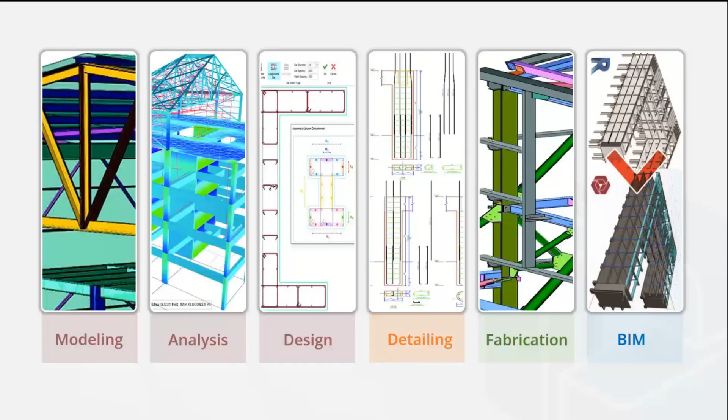ProtaStructure Suite consists of 4 different modules and can be provided as a single package. We have ProtaStructure, which is the core system for modeling, analysis, and design of your structures. It is complemented with other tools. ProtaDetails, a complete CAD system for automated detailing and drawings. It focuses on reinforced concrete detailing and includes a unique design library of calculations for designing things like retaining walls and piles.

ProtaSteel complements steel design by automating all the steelwork connection design, providing comprehensive steel detailing and automated connection design of your structures. Important to note, we provide assembly and part drawings and calculation reports for connections within ProtaSteel. Also, you can communicate to other software through ProtaSteel.

And finally, ProtaBIM allows you to connect with other tools and systems that you may be using, allowing you to collaborate better with your teammates. It has bidirectional integration with Autodesk Revit. ProtaBIM also allows you to communicate with other BIM platforms and software solutions through IFC and SAF files, or you can even share your analytical model data with SAP 2000 and ETABS.

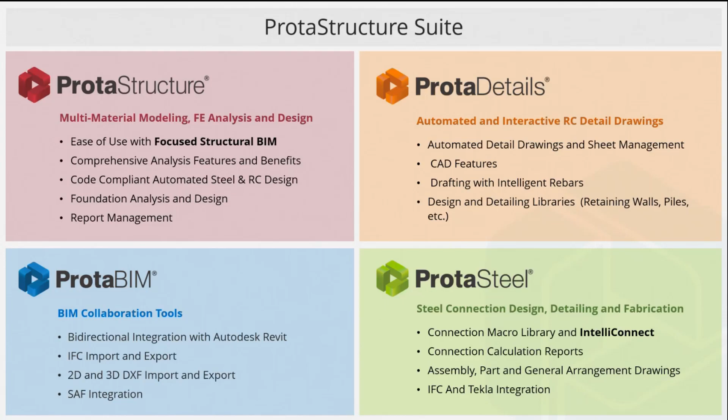So we have been expanding our reach around the world, covering 25 international design codes, 9 languages, such as Polish, Spanish, Portuguese, English, and Thai. We have also been busy creating design guides and insights into how the software works. For example, many of our users benefit from technical guides that cover guidance to, for example, punching shear checks, foundation design, seismic design, retrofitting, and many other topics.

Here, I want to briefly summarize some of the milestones of Prota Software's journey throughout the years. Some of you might actually know us from back in 1992 as Prota launched ProBina Orion, which is the world's first concrete building design and detailing system. In 2005, ProBina Orion had provided the first ever building solution for retrofitting and rehabilitation. In 2007, Prota invested in BIM technology and launched ProtaBIM, which, as I mentioned before, provides bidirectional physical model integration.

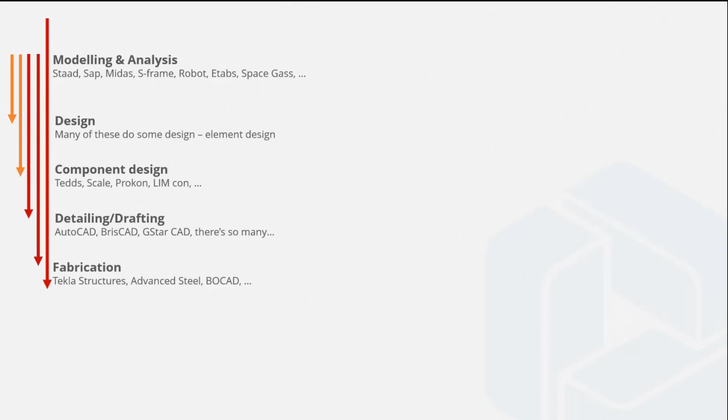As you know, there are several BIM software solutions that offer various services such as modeling and analysis, design, component design, detailing and drafting, fabrication, and structural BIM. Our core advantage is that ProtaStructure Suite offers these important features in a single suite. So we can confidently say ProtaStructure is a software for streamlined modeling and analysis, a software for designing your steel connections, concrete beams, core walls, foundations, and more.

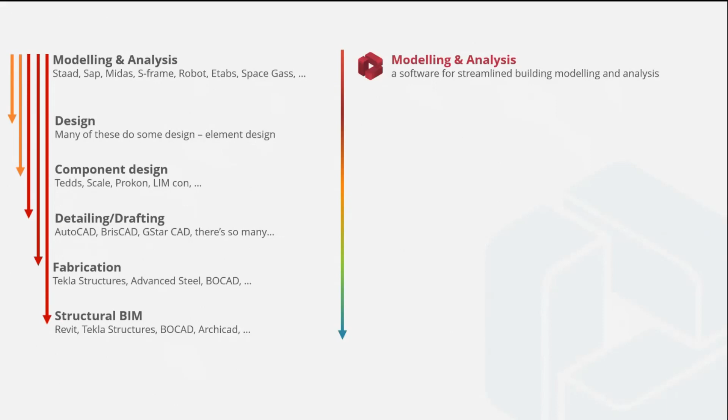A CAD software for dedicated structural drafting and producing all your engineering drawings, with component design for other project elements such as retaining walls. It is a fabrication software for producing all of your construction and shop detail drawings, and a BIM software for communicating all of this to other project team members.

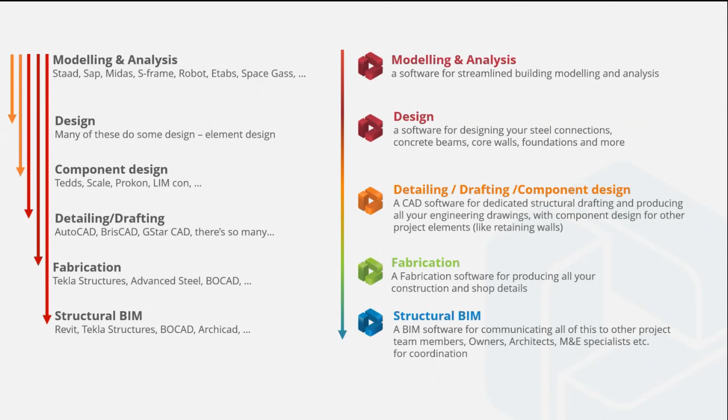As mentioned earlier, ProtaStructure forms the core of our suites. It's the BIM design solution for concrete and steel buildings. Some of the capabilities offered are flexible 2D and 3D modeling, multi-material modeling with physical objects, analysis and detailed design to international seismic and design codes, full design reporting and quantity takeoff, and so on. With ProtaStructure, your business will benefit from rapid modeling on an easy-to-use platform while effortlessly creating your intelligent drawings and full design documentation with the availability of a wide range of international design and seismic codes.

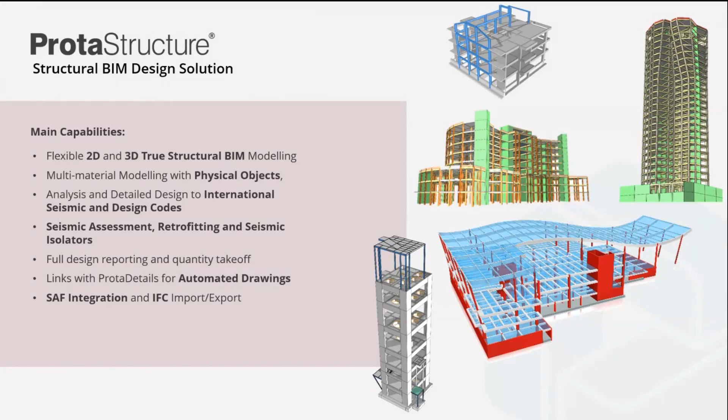Working with ProtaStructure, ProtaDetails is a revolutionary system for automatically creating and organizing all of your structural concrete detail drawings. ProtaDetails can automatically calculate quantity takeoff, full or partial. It is linked to the ProtaStructure model. Therefore, you can reflect the changes in the ProtaStructure model to the drawing in ProtaDetails automatically. There are many macros built into ProtaDetails, which will help you save time on component design. We continuously expand our library of component macros in ProtaDetails.

You can save hours of drafting time by seamlessly extracting the design details from ProtaStructure and automatically arranging them onto your company drawing sheets. Besides these unique features, ProtaDetails is a powerful CAD software, so you can use it as your daily CAD software.

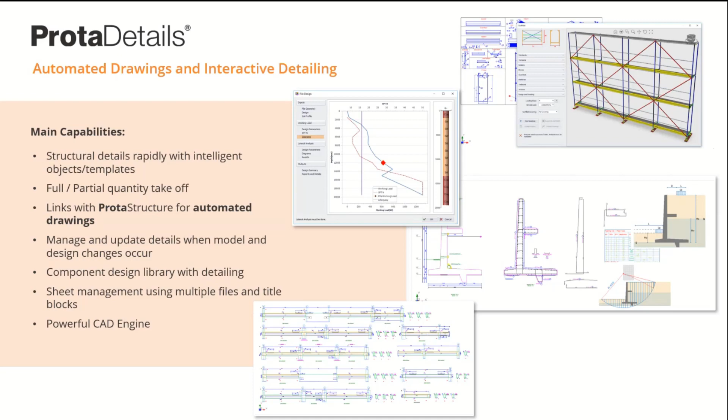ProtaSteel is our all-in-one steel detailing solution that allows structural engineers and detailers to perform automated steel connection design and produce high-quality steel assembly and part drawings in a few minutes. You can take models designed in ProtaStructure directly into ProtaSteel and save hours with the automated design of a comprehensive range of bolted and welded steel connections of your choice.

Similar to ProtaDetails, ProtaSteel is also connected to ProtaStructure. Therefore, the changes in the ProtaStructure model can be reflected to ProtaSteel, even though the modeling is done in ProtaStructure. You can add ancillary steel members in ProtaSteel, such as handrails, purlins, and girts. Furthermore, ProtaSteel allows you to export the model to other BIM software.

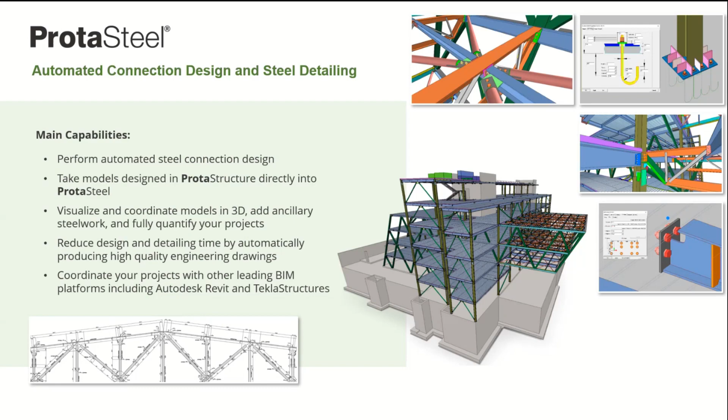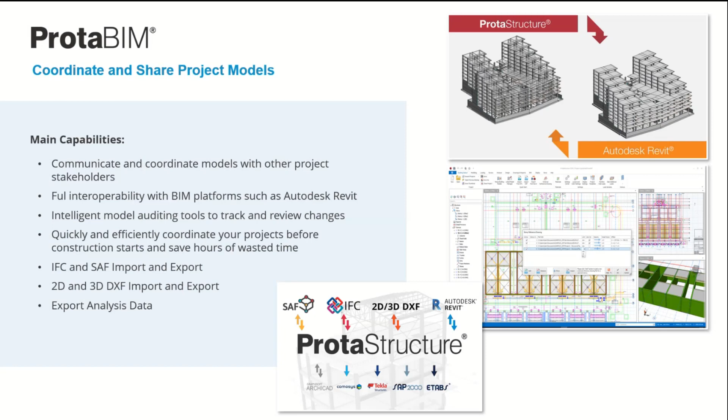So ProtaStructure is developed with BIM in mind. Here on this slide, you can see the entire BIM flow of our software solutions. Remember that these solutions are offered in a single economical suite called ProtaStructure Enterprise. So just to recap on our capabilities, you can bidirectionally link your models to other BIM platforms and software solutions like Revit with the latest data formats, including IFC, DXF, and SAF.

You can use ProtaDetails, our structural drawing and detailing software, for automatically creating and organizing all of your reinforced concrete drawings with only a single click. And you can take models designed in ProtaStructure directly into ProtaSteel and save hours with automated design of a comprehensive range of bolted and welded steel connections. You can even transfer and compare your analytical model with other general-purpose analysis software such as ETABS and SAP 2000. You can also create and share highly visual calculation reports with Microsoft Office and PDF export abilities.

So product excellence is a necessity in our sector, and it is also the key to our success. ProtaStructure is being used by thousands of large enterprises all around the world. Some of them are seen here. These organizations have been using our products to deliver their engineering projects.

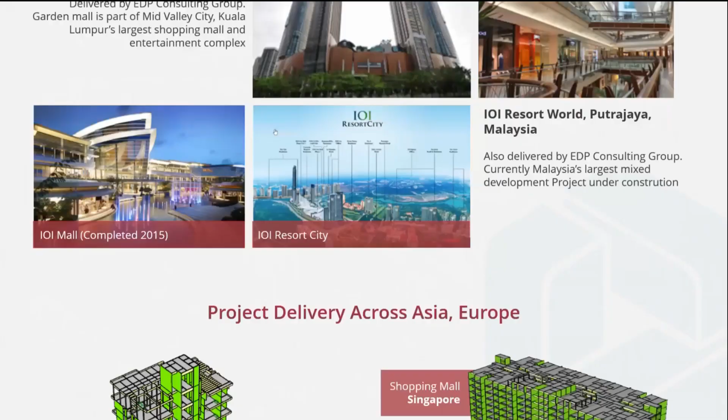A few other examples from Kuala Lumpur and Putrajaya in Malaysia. You can see Garden Mall and Resort City projects that were delivered in Malaysia with ProtaStructure Suite. And a shopping mall in Singapore and an office building are among other projects delivered with ProtaStructure Suite.

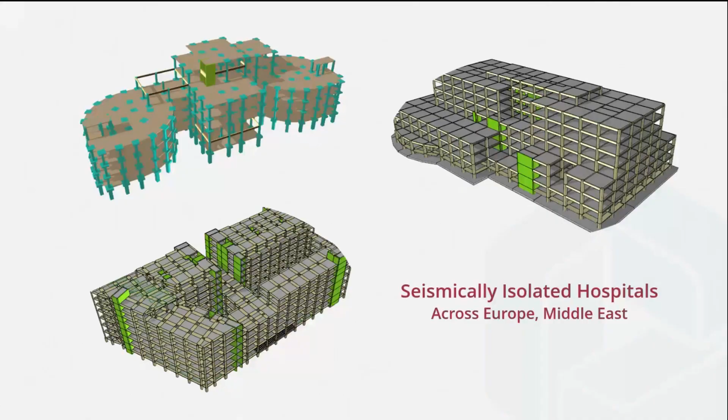Several hospitals were also designed with ProtaStructure. One worthy note is that these hospitals are also seismically isolated buildings. With ProtaStructure's unique seismic capabilities, you can insert seismic isolators into your buildings. Again, several international airports and train terminals across Russia, Kosovo, Egypt, and Turkey were delivered with ProtaStructure Suite.

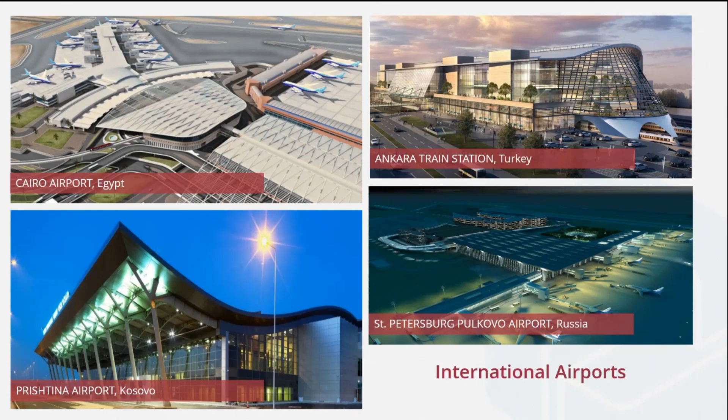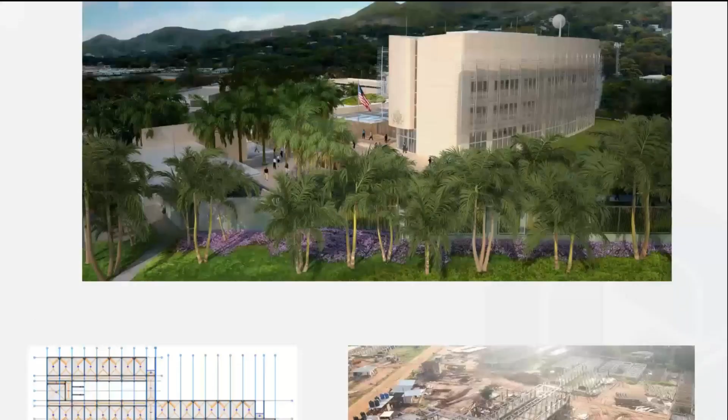And this is the USA Embassy building located in Papua New Guinea, which was also designed with ProtaStructure Suite. And this project is designed by Mr. Ofiku himself using ProtaStructure. The University Dome project is currently under construction in Nigeria. This is another project from Nigeria. The residential complex is supported by pile foundation. Another fascinating work from our users in Nigeria.

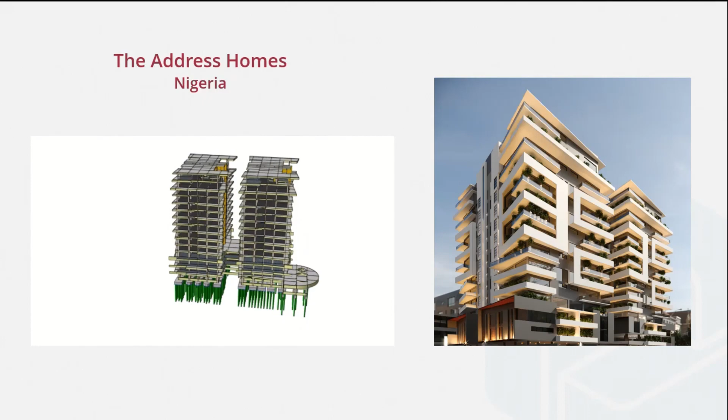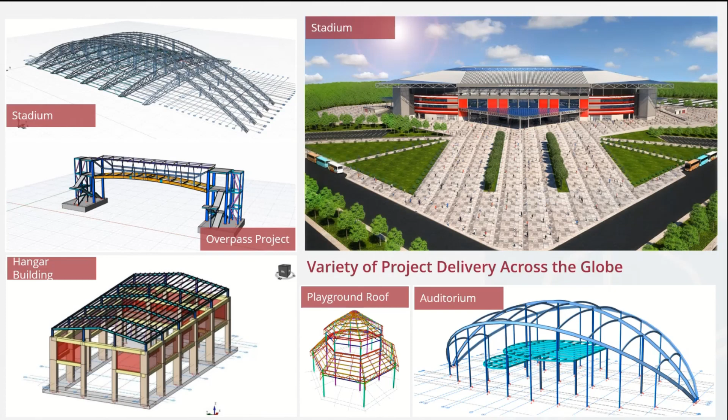As a summary, you can see that our strength lies in buildings and building-like structures. You can pretty much design any type of building with ProtaStructure Suite. Here you can see a variety of other buildings such as stadiums, auditoriums, playground roofs, and hangar buildings, modeled and designed by our users around the world.

So, what do we offer to our clients that have become customers? Our licensed users of ProtaStructure Suite do not just benefit from their licensed software technology alone. We give every new license owner 1 year of maintenance to ensure a smooth onboarding period for newcomers. Hence, within this framework, our customers are given access to our comprehensive and dynamic Prota Center, where they will be able to browse through our collection of knowledge base articles, create support tickets to get help from Prota support team,

view previous tickets and follow up their status, and ask questions in community forums and easily share information with other engineers. On top of that, customers are able to receive updates and new releases during their maintenance plan. For more details, you can reach out to our global sales team separately.

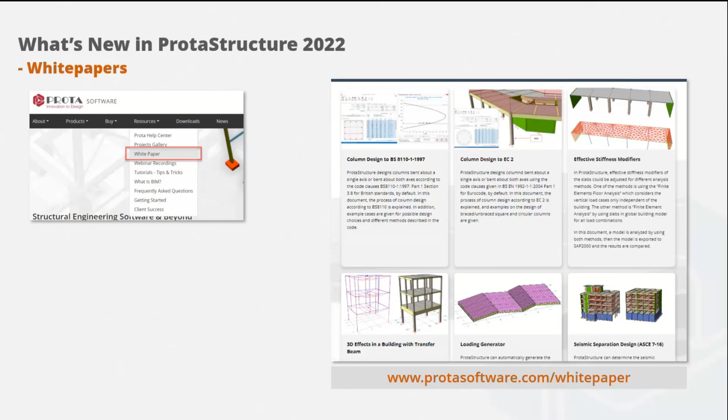As I have mentioned earlier, we have been writing a lot of white papers, which are technical documents highlighting mainly newly added features. So feel free to visit protasoftware.com/whitepaper to have a read. I am sure you will be interested to learn about the technical details surrounding these features. Of course, more material is made available to paid users through Prota Help Center, but the free content gives you an idea. We emphasize transparency and put much effort into being transparent with our users and believe in a healthy two-way communication from our community to ensure ProtaStructure Suite continues to benefit engineers around the world on a daily basis.

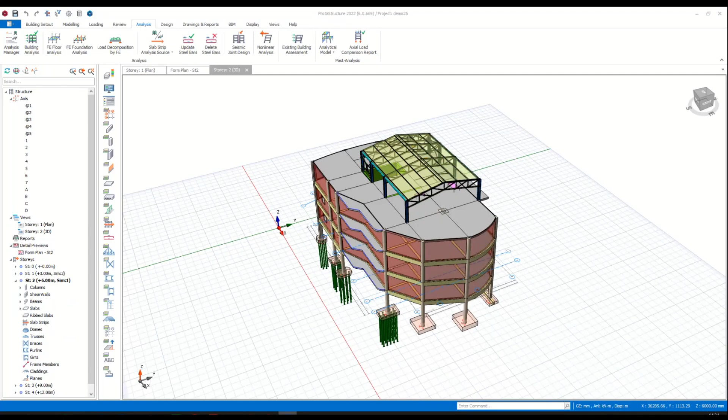And thank you for bearing with me for this long. I know you are excited to see the software. So, okay, this is ProtaStructure. In this part, I will give you a brief overview of ProtaStructure. Together, we will navigate through the software. So let's start with the structure tree.

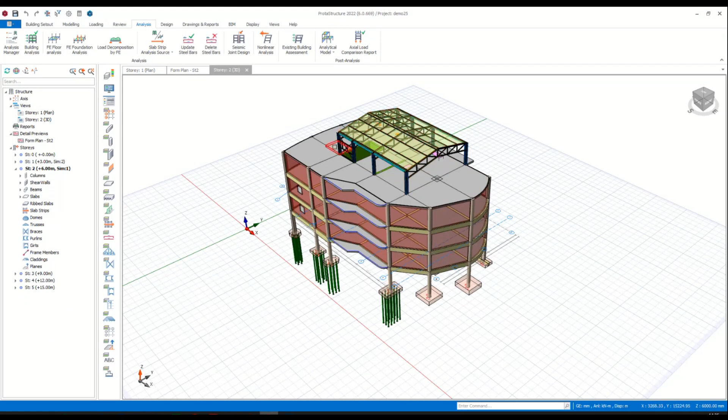Similar to every other BIM software, ProtaStructure has its structure tree on the left-hand side, which contains the information of your model. Under the structure tab, you have your axes listed like this. If you select any axis from this list, as you can see, they will be highlighted on the 3D view. In addition to the axes, you have your views here, which you can switch through. You can also switch between views at the top of the view screen.

And maybe the most important feature in the structure tree is the stories part. In this part, the components of the model are organized by story. So you can see each and every member of your model based on their story. You can see all of the columns in story 2, for example, all of the beams, slabs, and so on. You can use this interface to select them, and for complicated projects, you can use this list to find a specific member in your model easily.

On the top, you are seeing our revolutionary ribbon menu. This ribbon menu is designed considering the workflow of designing a project. You start your project by setting out your building. Then you model your structural members. Then you continue with loading. Before the analysis, you review your model, your loading, your sections. And you continue with the analysis. After the analysis, you design your members and get your detailed drawings and calculation reports.

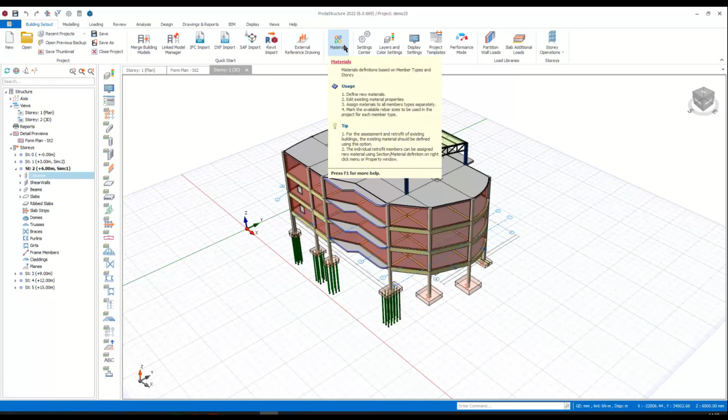And right next to it, you will see the materials tab. Materials are, as you know, very important for structural design. So we have created a well-organized material selection window here. So in ProtaStructure, you can have different floors with different materials. So you can add different stories having different materials from here.

And then for each story, if you like, you can change the materials for columns, walls, beams separately. The similar applies to the steel members. You can have different steel grades for different types of members.

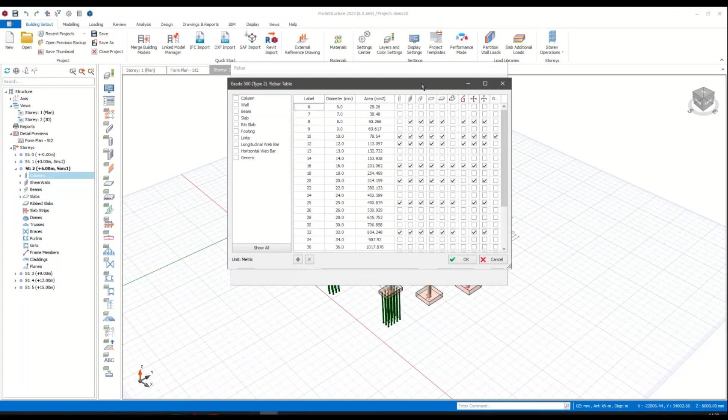Also, for the rebars, you can specify the available rebar diameters in your region from here for different types of members, again, for columns, walls, beams, and so on. And the program will obey your preferences that you have made here and use the available rebars only in structural design.

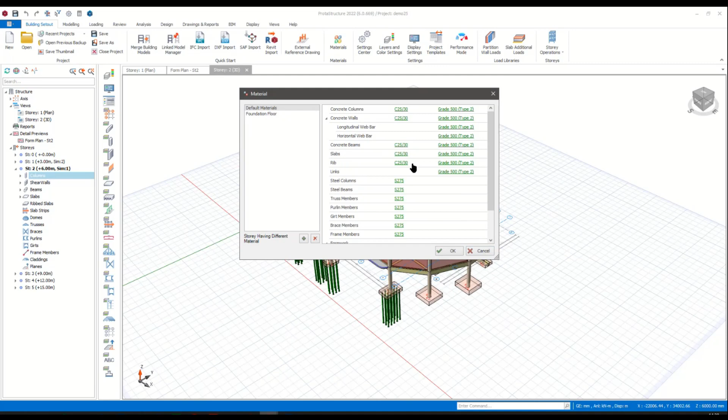And also, in addition, every input here is editable, so you can change the material properties, or you can add new materials if you want. So let me continue with the settings center. Most of the parameters and settings related to the use of the program, the interface, and the design preferences are organized in this options pane.

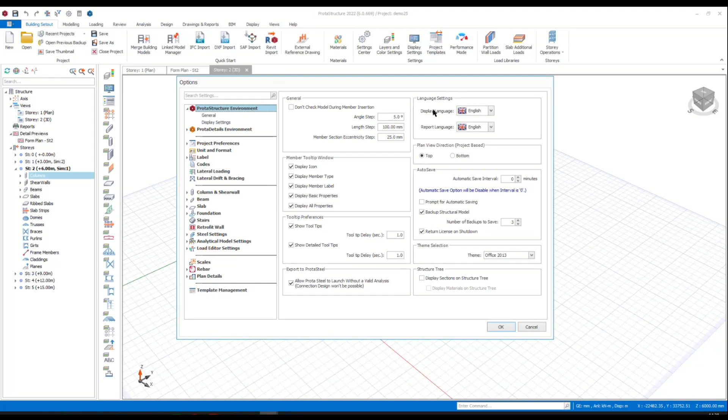Here, for example, you can change the language of the software. You can change the theme, and you can change your units and formats. So you can change the units anytime you want. For example, you can change the units after you model the structure, after the analysis. You can change the units anytime during the design process. We have three main unit systems, which are SI, MKS, and Imperial.

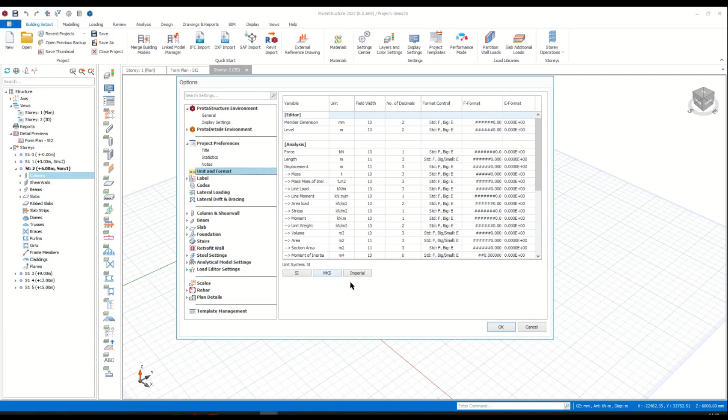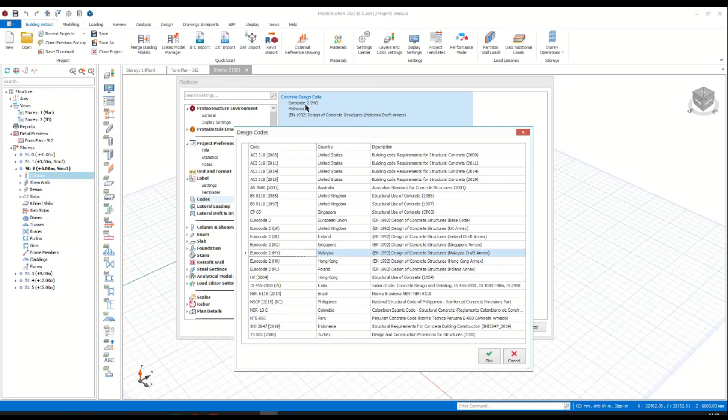So again, here you can change the label settings, the display of labels in plan view. You can change them from here. And most importantly, you can change your design codes. So ProtaStructure supports many design codes all around the world. So you can just change them by clicking on them, and you can select the code you want from the list.

And in addition, you can change some design related stuff for elements. For example, you can change your rebar preferences for columns. You can change the rebar patterns for your beams. You can make many adjustments regarding the design of the members.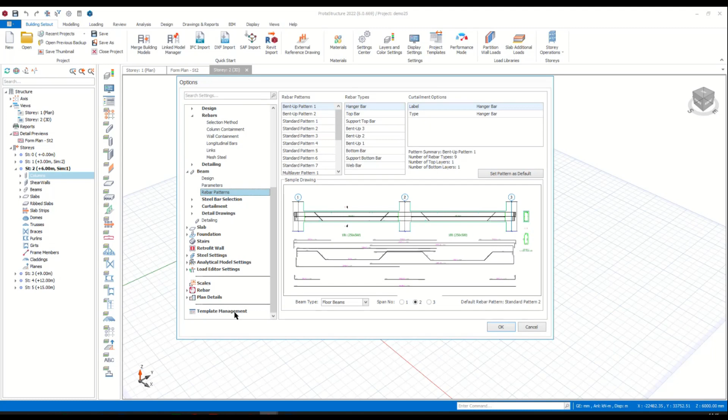Also, another important thing here is the template management part. So ProtaStructure uses templates which contain the settings in them. So we provide you some localized templates at the beginning. Once you want to create a new project, you have to select a template.

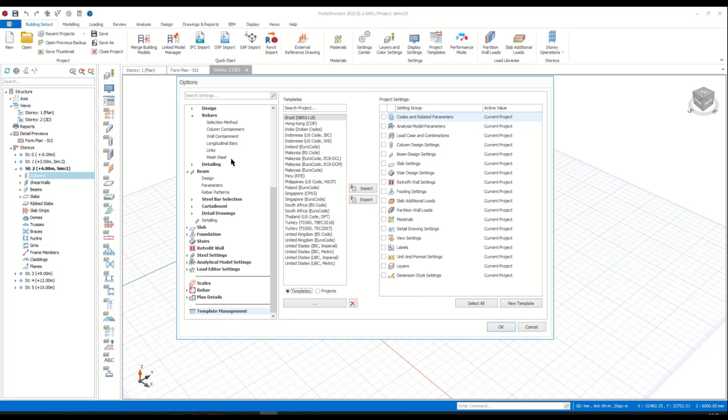And in addition to these predefined templates, you can use your past projects as your template. So you do not have to mess with the settings every time. You can use your past settings from another project. So again, next to the settings center, we have some shortcuts for certain settings. And also, if you are running a low spec PC, you can use performance mode to have a more fluent experience with ProtaStructure.

And here we have load libraries for partition wall loads and slab additional loads. So from here, you can basically build your wall and make the software calculate its load value. So we have some predefined ones here. You can add new ones if you like.

And also you can add new layers to the walls, for example, plaster or tiles. You just enter the thickness here, and the software will automatically calculate the total load value. Also, you can add new materials to become layers from this edit materials interface.

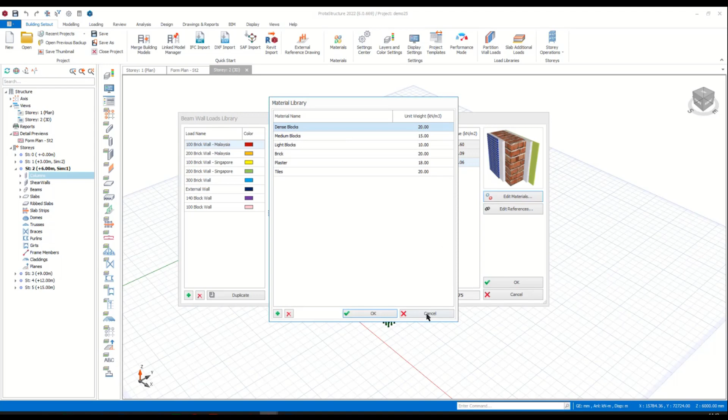And also another important aspect here is the story operations part. So from here, you can insert new stories to your building. You can remove existing ones. You can delete the members in a particular story, or you can generate stories from one to another.

Also, the edit story menu is a very important menu in which you can see the overall information regarding your stories. You can set your effective top story and number of rigid basements, which are very important inputs for seismic design, especially. And again, from here, you can adjust your story bottom level so that you can arrange the other story elevations. And also you can specify your foundation depth from here.

And another aspect here is the similar stories concept. So in ProtaStructure, you can make two stories similar. In this way, if you change anything in one of the stories, the changes will be reflected to the similar stories.

So you can use this feature, for example, for making small adjustments in your building. So you have, let's say, 10 stories. They are all similar, so you can make the changes in only one story, and the changes will be reflected to the other 9.

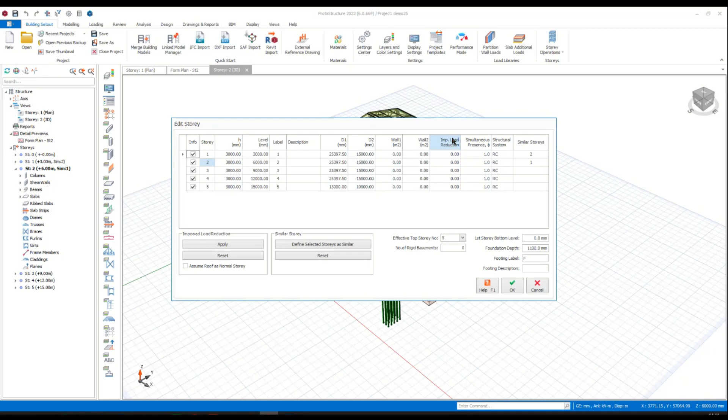And next to the building setup, we have the modeling tab. Here you have mainly 2 different ways of modeling axes. So you can model them one by one using grid, and also you can insert multiple orthogonal axes using the orthogonal axis generator.

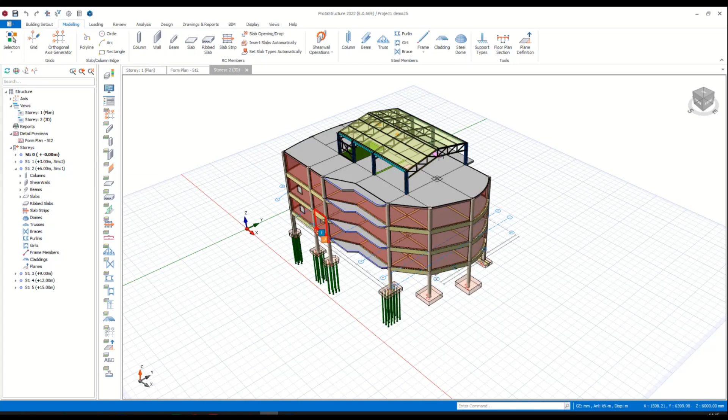Next to those, we have some drawing tools for slab or column edges. For example, this balcony slab here is modeled using the polyline option here. So I have drawn a polyline around the edges, and then I have inserted a slab inside it. Similarly, you can draw some enclosed polylines and convert them to columns.

And in the reinforced concrete modeling, we have organized all of your reinforced concrete members here in this section. You can have your columns, walls, beams, slabs, and other concrete members. Also, you can merge concrete wall panels and unmerge them from here.

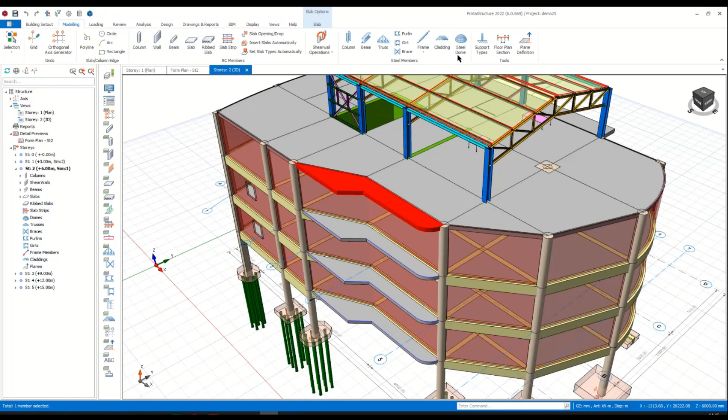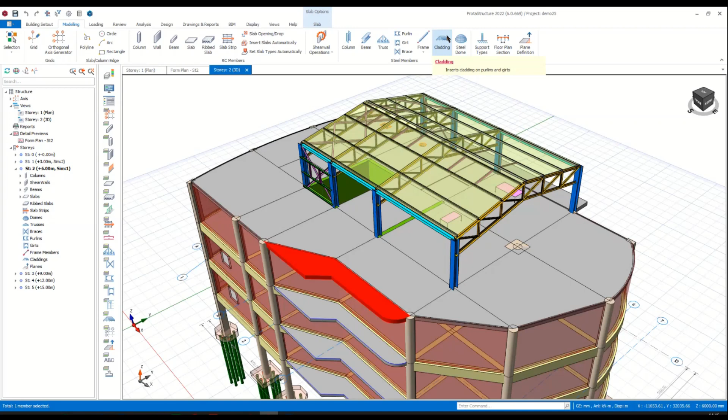And then, similar to the concrete members, we have grouped steel members here. In ProtaStructure, you can model steel columns, beams, trusses, purlins, girts, and braces. And we also have a multi-purpose frame member, which you can use for free modeling. And on top of that, you can add claddings on purlins and girts to decompose your loads.

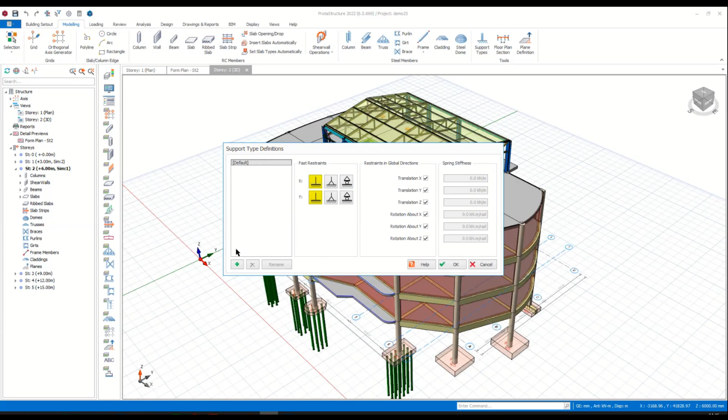So support types are another important aspect of structural modeling. By default, we offer you a fixed support for both directions, but you can change it and you can add new support types from here. You can have your supports pinned or roller, and you can arrange each and every degree of freedom from here. If you like, you can add some springs for those degrees of freedom too.

And lastly, in this tab, I want to mention the plane definition. The plane definition is mainly used to model slanted members. You can define an imaginary plane on the plan, and then you can make your members, your slabs or your beams, for example, adjust to that plane so that you can have slanted slabs or beams.

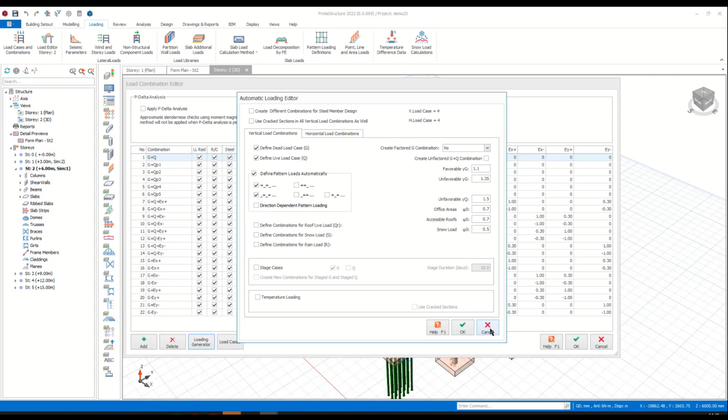So now we have covered the modeling part. Now let's move on to the loading. The first thing here is the load cases and combinations. ProtaStructure can automatically produce your load cases and combinations according to the selected design codes and your preferences that you have selected here. We have separated the vertical loads and horizontal loads into these tabs so that you can set your preferred settings, and if you press the OK button, the combinations will be automatically created.

And if those load cases are not enough for you, you can add your user-defined load case. And after adding those load cases, you can edit those coefficients for each load case here, to include your user-defined load case into the load combinations. And of course, you can add new load combinations by using this add button, and you can delete them with the delete button.

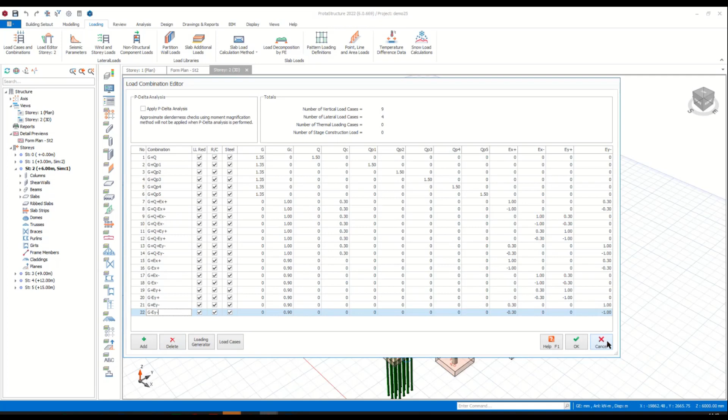So next up is the load editor. ProtaStructure has a comprehensive load editor in which you can see every applied load on a certain story, and also you can open this load editor on an element basis, which I will show you in a minute. So from here, you can see all of the loads applied to the structure. You can apply new loads to the selected load case here.

Also, another important note here: let's click on this one and we can see the properties of this load, and it says this load is decomposed from 2S1 slab. What this means is ProtaStructure automatically decomposes the slab loads into your beams during the modeling phase with the default method, which is the yield line method. We also have finite element method decomposition, but you have to conduct a finite element decomposition analysis to do that. But for the yield line method, they are automatically decomposed during the modeling phase.

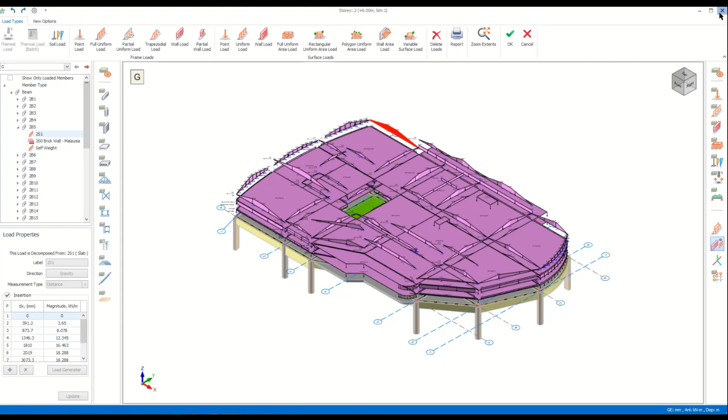So also let me show you the load editor on an element basis. Here you can only see the 2C10 column, so that you can apply your loads, point loads, uniform loads, trapezoidal loads on the column separately from the other members. Also, you can copy and paste the applied loads between similar elements.

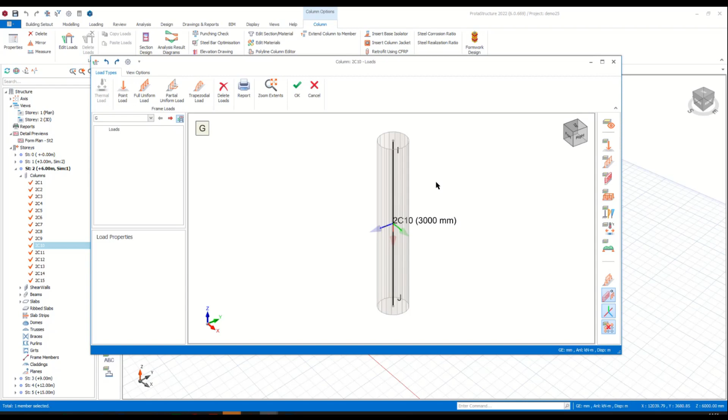And let's move on to the seismic parameters. So we have a very comprehensive seismic parameters interface in which you can see the design spectrum and elastic spectrum in the middle. Also on the right-hand side, you can see the spectrum points. Of course, these spectrums are calculated as per the selected earthquake code and using the user-defined seismic and structural parameters given on the left-hand side.

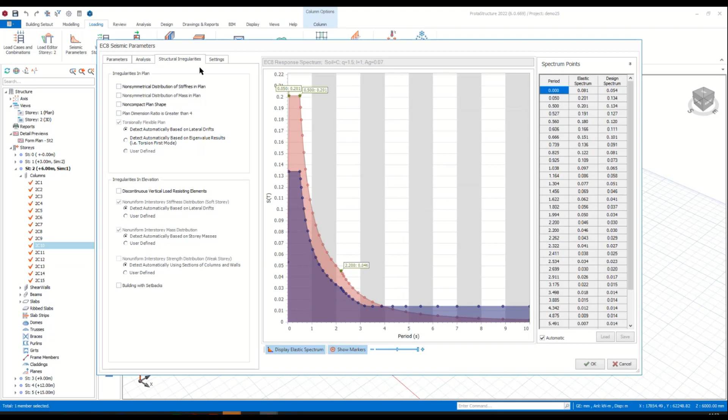Also, ProtaStructure can automatically detect some of the seismic irregularities on your structure, and for the other ones, you can specify them from here, and then their penalties will be applied to your model by ProtaStructure.

From this button, you can calculate and assign your wind loads at story levels. With this one, you can calculate the non-structural component loads. And next to them, we have a shortcut for the load libraries again. We have discussed that. And here you can see the slab load calculation method, which I have discussed earlier. The default one is the yield line method, and you can change it to the finite element method from here. And if you change it, you have to do load decomposition by finite element analysis.

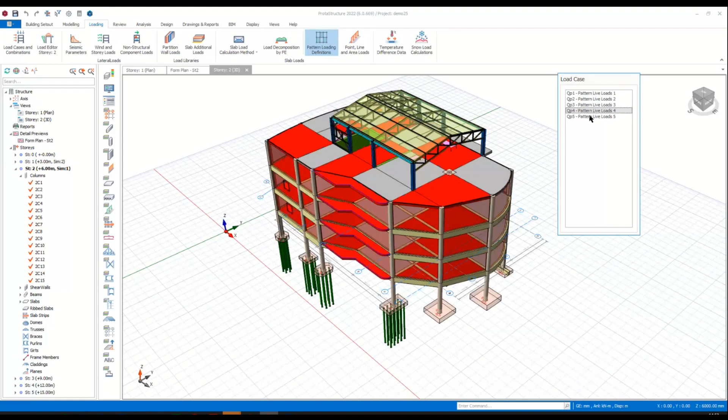Also, the live loads are applied to your structure with checkerboard patterns. Here you can see the different cases in which the loads are applied. And using this point, line and area loads button, you can add point, line or area loads on your slabs. And from here you can enter the temperature difference data, and from the snow load calculations you can calculate snow loads for certain cases.

So after loading and before the analysis, we may want to review our model. So ProtaStructure offers you an automatic building model check from here. What this does is it investigates your model and detects inconsistencies, such as overlapping members, overlapping axes, unused axes, and so on. So before the analysis, I strongly recommend you to conduct the building model check and fix your model if you get any errors.

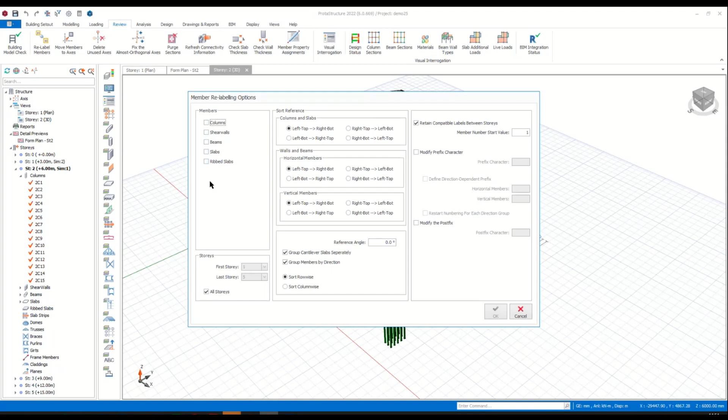Also, you can relabel your members from left top to right bottom or right top to left bottom, and so on. You can select which members you want to relabel, and then if you start the relabeling, it will change the labels of your columns, beams, and walls according to the rules that you have selected from the interface.

And also, we can move members to axes, delete unused axes, and fix almost orthogonal axes automatically from these functions. And the software can automatically check your slab thicknesses and wall thicknesses, and it can list the member property assignments for each member.

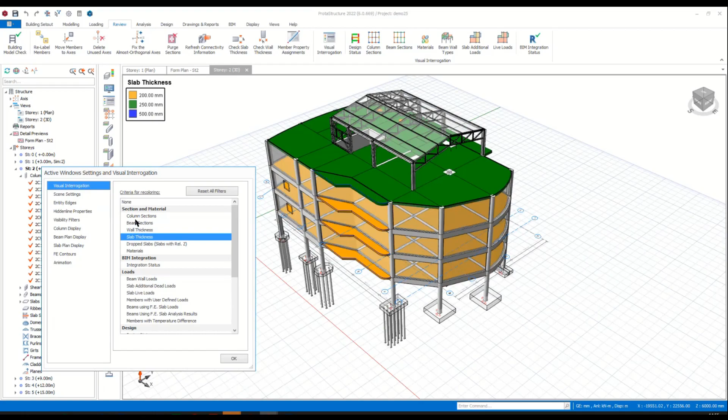And here we have the visual interrogation. It's another important aspect of ProtaStructure. This is a very important tool that you can use during modeling, after analysis, and after design; you can use this tool in each part of the workflow. So, for example, you can see different column sections, different beam sections, different slab thicknesses, and so on to control your sections. And also you can see the used materials as well.

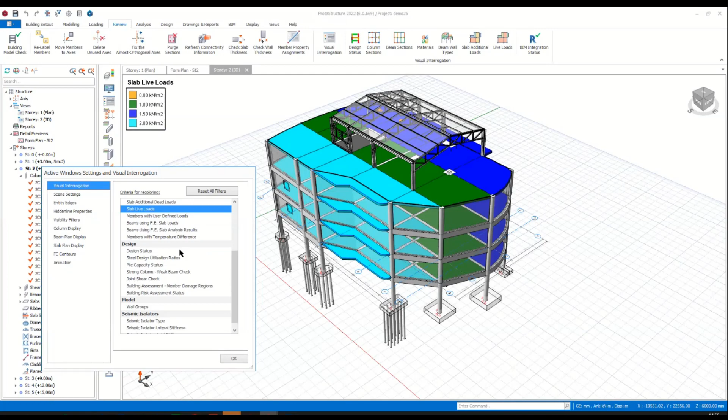And for example, after you load your structure and you want to check if you have loaded your structure correctly, you can use this part to check slab additional dead loads and slab live loads. And after the design, you can see the design status of each element. You can see the steel utilization ratios. You can see pile capacities, strong column weak beam checks, and so on. So again, it's a very helpful tool for you. It can be used in each stage of your workflow.

And next to that visual interrogation button, you can see some shortcuts for certain visual interrogation features, such as design status, beam wall types, slab additional loads, etc. So we have reviewed our structure. Now we can move on to the analysis.

And at the left-hand side, you can see the analysis manager, in which all of the conducted analyses are listed. So if you have done building analysis, it will be there. If you have done finite element floor analysis, they will appear in the analysis manager. And you can delete the existing analysis from there if you want. So let me move on to the building analysis menu.

And in this menu, in the pre-analysis tab, you can find some general information and important shortcuts for Settings Center, for system parameters, for loading combinations, and wind and story loads. And also the materials are previewed here, the used materials. And again, we have a shortcut for the edit materials part.

In the model options, you can set the options for your analytical model. So for example, you can specify the material and section effective stiffness factors, which will be used for the cracked concrete load cases. Also, you can find the soil structure interaction options here.

And you can set how you like to model your shear walls in the analytical model. You can use mid-pier model, or you can use finite element shell model, which is the state of the art right now. So similarly for the slabs, you can set them to be included in the building model. You can set their shell mesh sizes here. You can set stories to be meshed. For example, only the fourth story will be meshed for this model during the analysis.

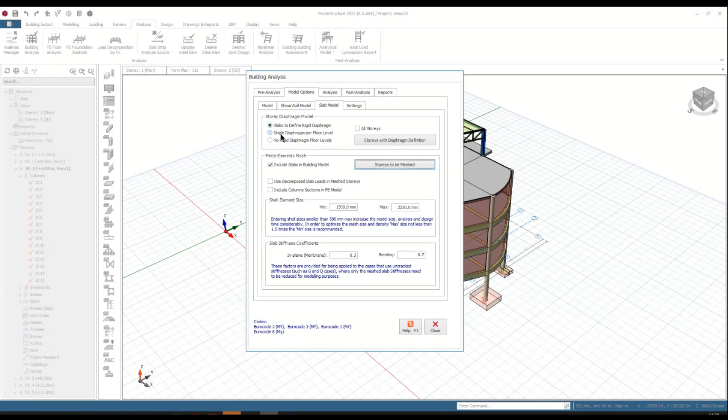And also you have the rigid diaphragm options on the top. You can set slabs to define rigid diaphragms. You can set single diaphragm per floor level, or you can set no rigid diaphragm for floor levels. And also you can specify the stories with diaphragm definitions. So in this model, we will have slabs to rigid diaphragm for story 1, 2, and 3, and there will be no rigid diaphragms for stories 4 and 5.

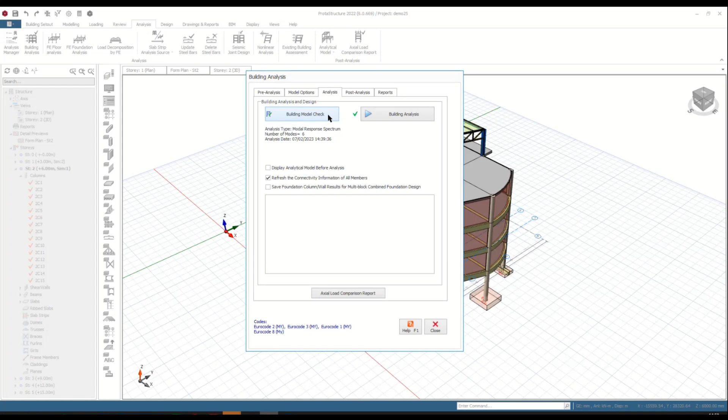So after you set your options, you can move on to the analysis from the analysis tab. So here we again have the building model check shortcut. If you have forgotten to do it, you can do it just before the analysis. And if you press this button, the analysis will start. At first, the software will automatically convert your 3D physical model into an analytical model, and then it will do the analysis.

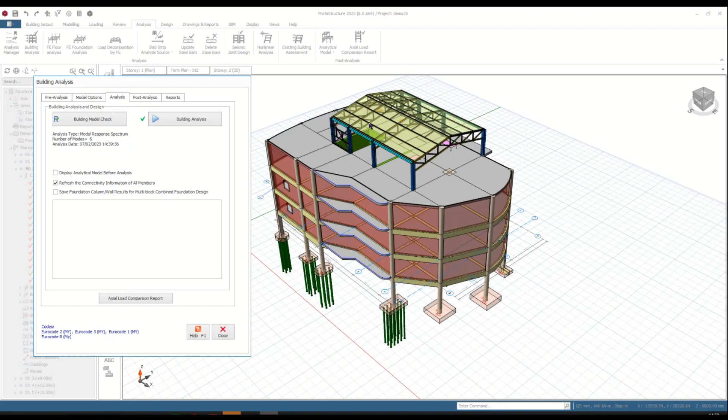After the analysis, you can display the analytical model like this. So you can see the displacements. You can animate the displacements. You can see the deflections for each direction, and also you can see the internal forces, internal reactions by drawing diagrams. And also we can draw contours on top of the shell elements, all of which will make you understand your building better.

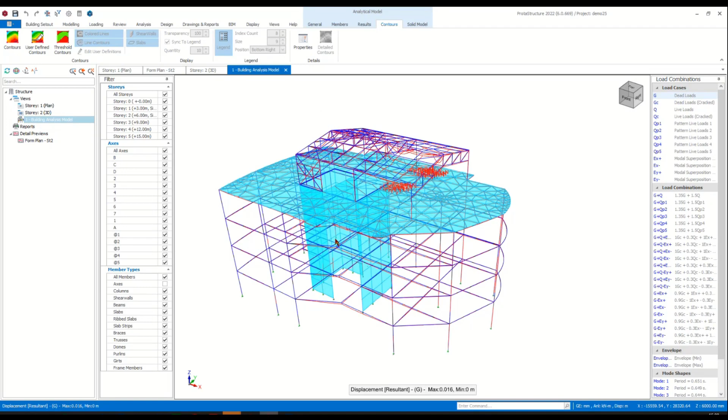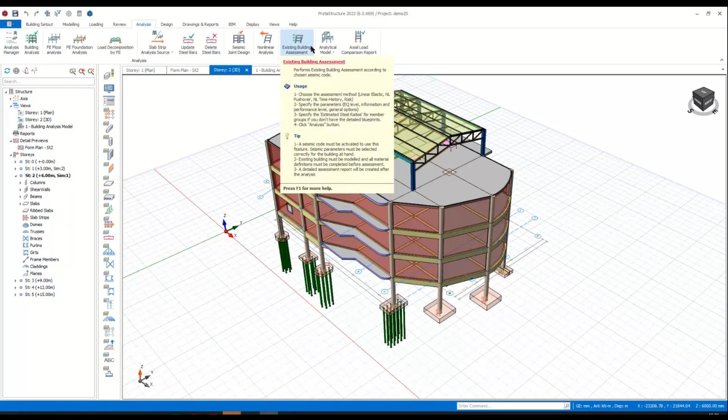Okay, so in addition to the regular building analysis, we have also finite element floor analysis, which isolates the active story and performs a finite element analysis for just the vertical loads. And we have finite element foundation analysis. And as we have mentioned before, we have load decomposition analysis here. In addition to those, we can do seismic joint design. And we have nonlinear analysis capabilities for regular nonlinear analysis and existing building assessment. We can do pushover analysis and time history analysis in ProtaStructure.

So after the analysis, you pass to the design phase. Here with this button, with the design all button, you can design all the elements that you have in the model. So similar to the modeling tab, we have organized concrete members on the left and steel members on the right. So you can go one by one for columns, beams, rib beams, foundation beams, and so on, and design all of your structural members and get their calculation reports.

The same applies to the steel members. You can design your steel columns, beams, and other types of steel members from here. In addition to those, ProtaStructure has CFRP for retrofitting reinforced concrete columns and beams, which is used for retrofitting purposes. Also, we can design your formworks. You can get the calculation reports and detailed drawings from here.

After the design, you can move on to drawings and reports. For concrete drawings, you can switch to ProtaDetails, and you can produce your reinforced concrete drawings from here. Also, before passing to ProtaDetails, you can preview certain drawings in ProtaStructure. For example, this is the form plan for the second story. So this drawing will be exported to ProtaDetails once you launch it.

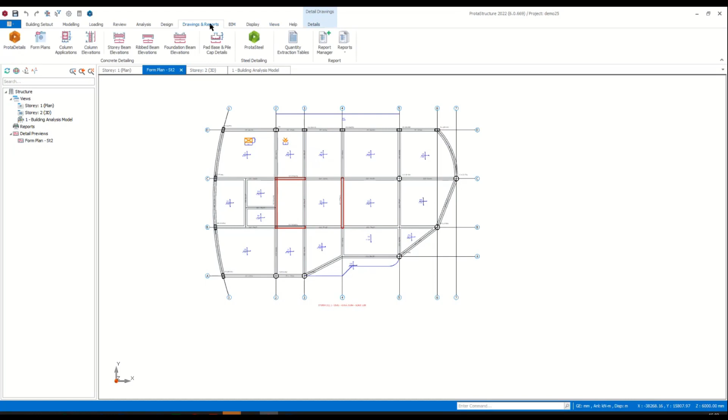For the steel members, you can launch steel members and steel connection design. You can switch to ProtaSteel. Your model will be imported to ProtaSteel, and you will be able to do connection design, and you will get your assembly drawings and your part drawings. Also from here, you can get the concrete quantity extraction.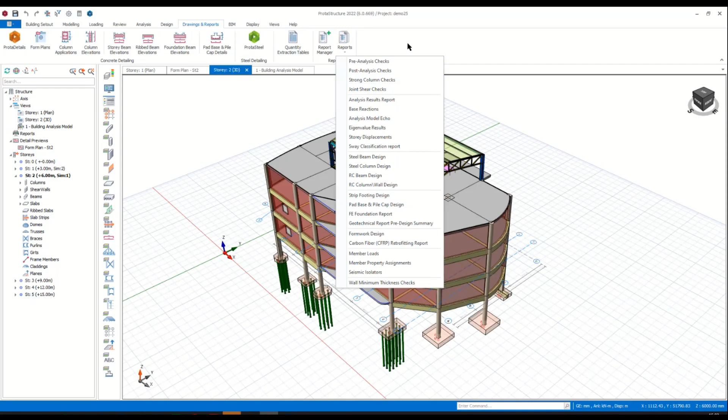And finally, you can create your reports. From here, you can create code checks, which contain mostly the seismic checks of your building. For example, you can see the strong column check reports from here. We have many different reports for your structure. And after you have created the reports, you can combine them using the report manager.

In Report Manager, in the middle, the available reports are listed. They're organized into model information, analysis reports, design reports, and so on. You can take the reports that you're interested in, drag them, and drop them to the left, and they will drop into this list. So in this list, you can change the orientation of the reports.

And then once you're satisfied, you can save this list to be used in later projects. So you do not have to do it for each of your projects. You will have a report set, and you can use it for all of the other projects. So after creating this report, you can export it to Microsoft Office, or you can export it as PDF.

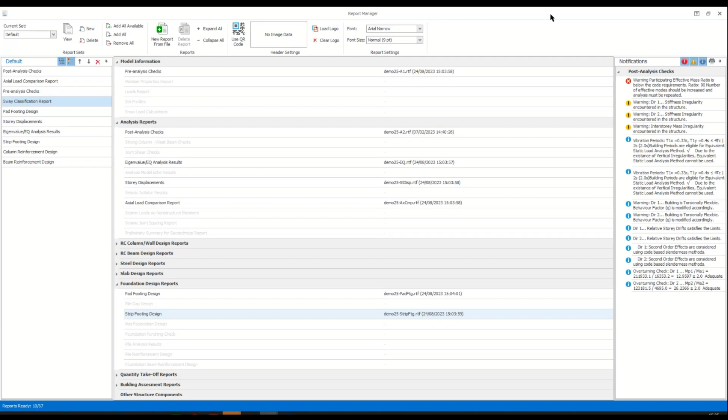And next up is the BIM tab. Here you will find all of the shortcuts for BIM abilities. For example, you will have the IFC import and export tabs. You will have the DXF tabs, SAF. You will have the Revit tabs, and also you can export the view of this active window to an image. So you can export this view as an image.

You can export to 3D printers. You can export your model to 3D PDF, and also you can export your analytical model to SAP2000, ETABS, or OpenSees to compare the results.

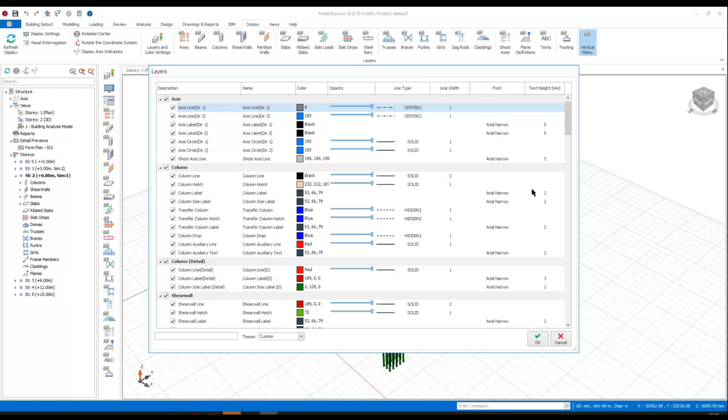Next to the BIM tab, we have the Display tab. Here, using the display settings and layers and color settings, you can change colors and the color of the background. For example, you can change the color of columns, the hatch of the columns. You can change their opacity, and you can achieve your desired coloring in the views. And also we have a shortcut for visual interrogation here too, for your convenience.

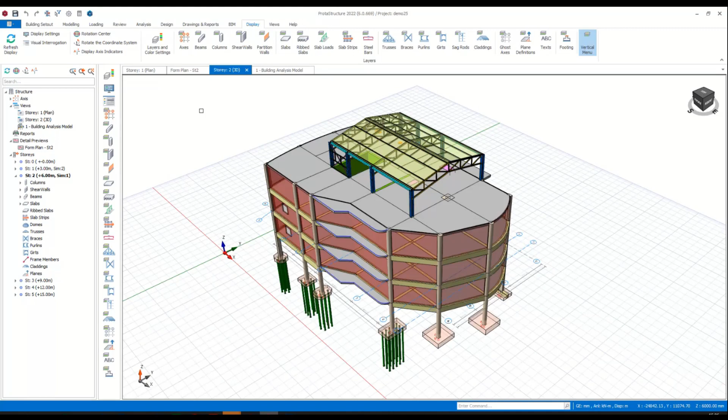And let me talk a little bit on these layers. So on the right-hand side, you see a button called Vertical Menu. This will deactivate and activate the vertical menu here, which is the same as this menu. This is very handy because if you work with a complex project, you may want to hide some members. For example, you can hide your beams, your columns, your partition walls, your claddings, etc.

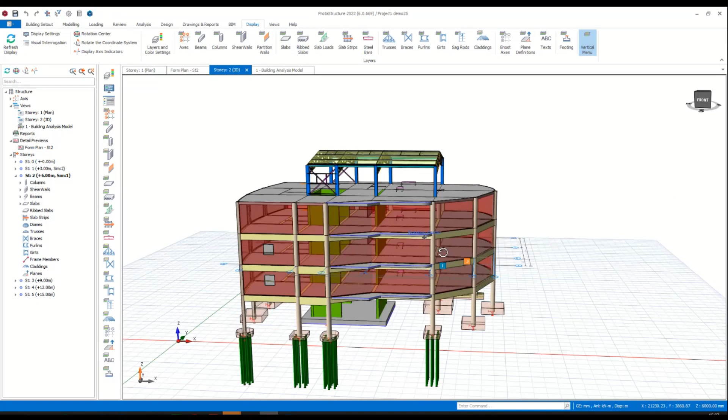So in addition to those hide functions, you can use Select and Hide Selected. You can use Show Selected Only, and this will help you when dealing with complex projects.

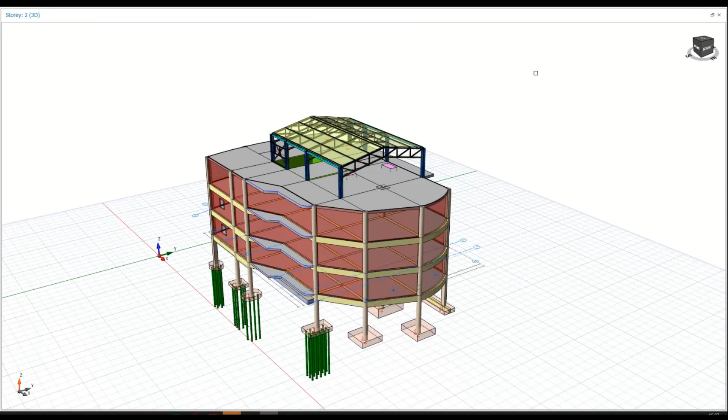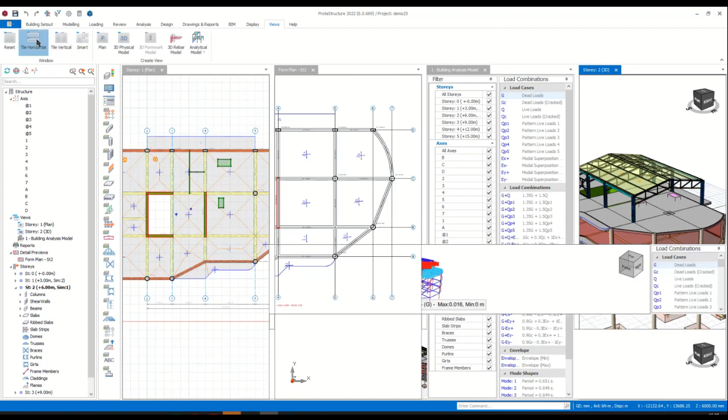And next to Display, we have the Views tab. Each view in ProtaStructure can be undocked. You can make them full screen like this. You can move them to your second screen if you have one. And you can dock them side by side like this. You can have all the active views shown on the screen. You can tile them vertically, horizontally. You can reset the view.

From here, you can open a new plan view. You can open a 3D physical model view. You can open the 3D rebar model, and you can access your analytical model here.

Lastly, I will talk on the Help tab. In this tab, you have the link for the basic training guide for ProtaStructure. You have the link for the ProtaStructure Help Center, and you have the license-related buttons here, like Return License to Server, and About ProtaStructure, which will show your license information. Also, you have the Check Updates button to check for updates. You can do your updates from here.

And lastly, let me show you the start page. Once you open the software, this page will welcome you. On this page, you will see the Open Project button, the New Project button, and your recent projects. On this pane, in the middle, you will see your license information. At the bottom of that, you will see the software updates. And we have the Resources pane and the News and Videos pane.

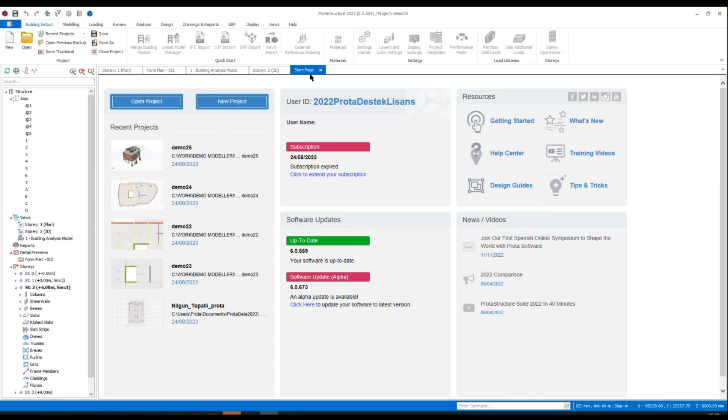That was basically it. We have overviewed the menus and buttons in ProtaStructure.